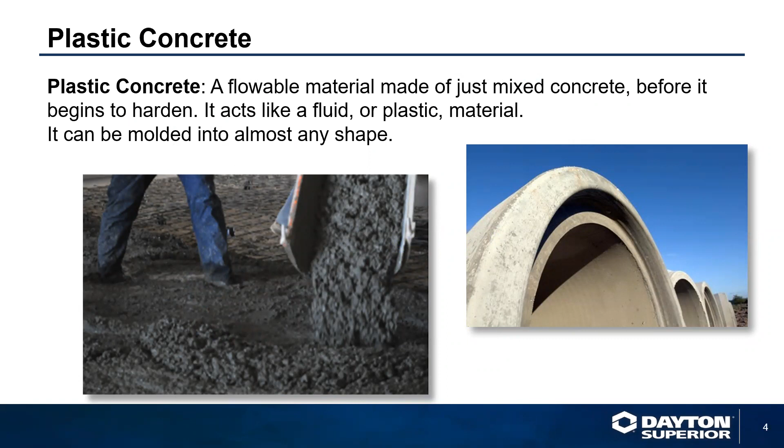Plastic concrete is typically a flowable material made of just mixed concrete before it begins to harden. It acts like a fluid or a plastic material. It can be molded into almost any shape, and typically it is molded with concrete formwork. The formwork is the mold of the system.

As in all products here that we manufacture at Dayton Superior, there is the safety factor involved. Concrete formwork products have a safety factor of 2-to-1, which means if you take the ultimate load or the failure mode of that product and divide it by 2, you come up with the safe working load of that product.

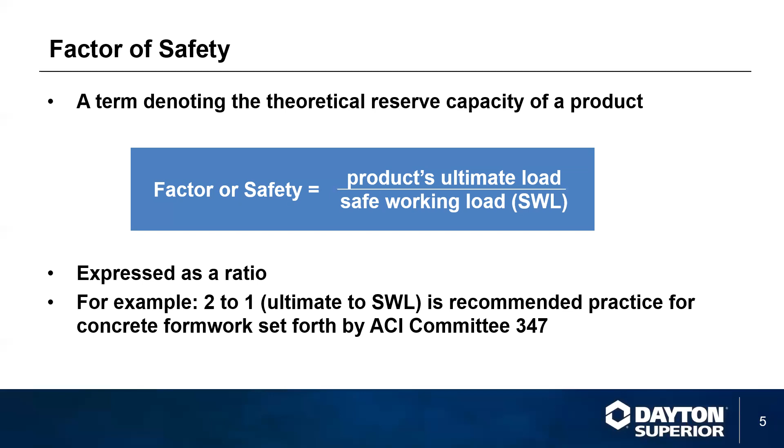We'll talk about formwork, building forms using sticks and boards, the snap tie system, the Jahn system, the Sure-Lock Tie system, and the other systems available in this training. First, let's talk about sticks and boards, or light forming.

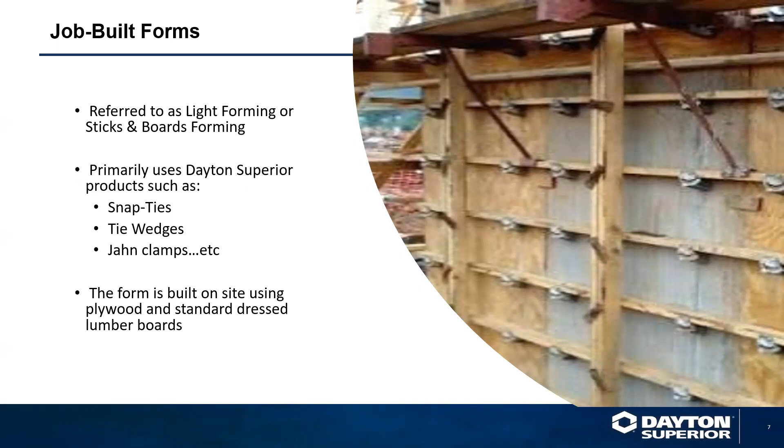Primarily use the Dayton Superior products such as snap ties, tie wedges, Jahn clamps, omni wedges, etc. This form is built on site using typically 3/4-inch plywood and standard dressed lumber, 2x material.

In the cross-section view of this system, you can see we have our plywood sheeting in place with a stud behind it, which is a vertical wood member, followed by a waler, double waler behind it, and then an omni wedge holding the snap tie in place. That omni wedge is also taking up any slack in the system to tighten it up.

Now, the snap tie that's holding the system together comes in 2 varieties. We have a standard cone snap tie, which has a cone on it, typically used on areas that are going to be exposed, so that they can patch the hole and rub it down. We also have a washer snap tie, which is typically used for below grade.

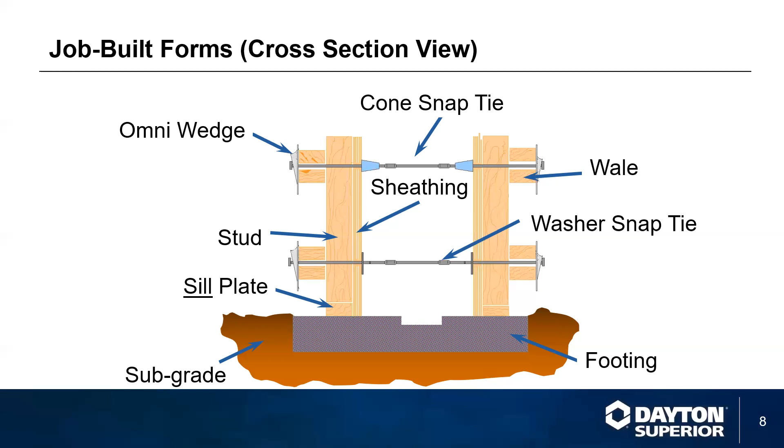I say typically, but a lot of this all has to do with contractor preference.

Walers and Strongbacks. You're going to hear terms of walers, strongbacks, studs, etc. today. Just remember, typically in formwork, when you're using snap ties and wood forming, anything that you have as a vertical board against the plywood sheeting is known as a stud.

A waler is a horizontal reinforcement member behind the plywood. And a strongback is a vertical component that is sitting behind the waler. So if your waler is against the plywood, then the strongback would be sitting behind it.

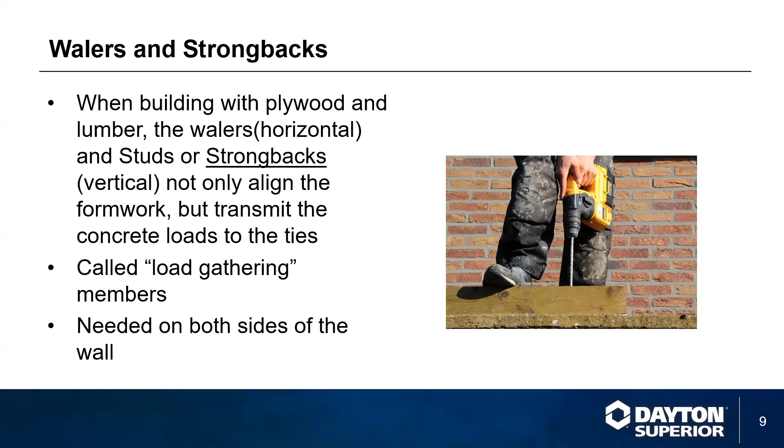Realistically, there is no difference in material based off of strength or the direction of the material. What comes into play here, though, is the plywood, whether it's sitting in the strong or weak direction. So therefore, it is contractor preference how they want to arrange their formwork.

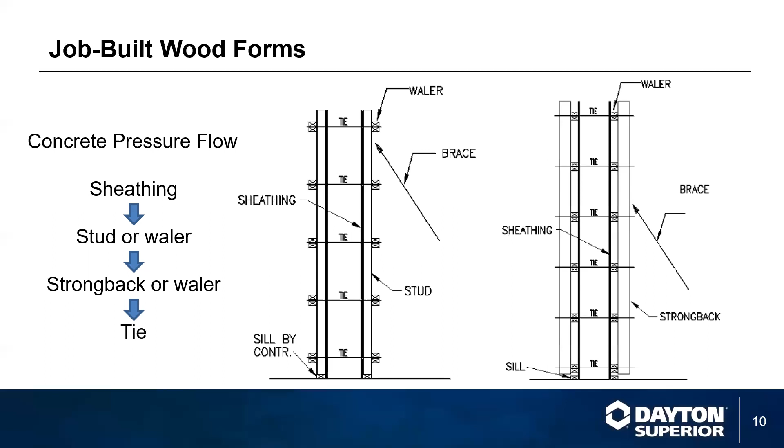The snap tie typically is a hex-headed snap tie. It typically has a hot forged hexagonal head at the end of the tie. The head is actually forged so that you can use a socket to remove it, like a 6-point socket wrench.

The breakback of the tie, which every tie has, is a part of the tie that is actually set, has a little nick in the wire, so that when you put this tie in stress, it will snap off at that breakback point. The breakback point typically is 1 inch inside the wall dimension. So you have a standard wall dimension, your breakback is typically going to be 1 inch.

It can also be 1.25 inches, 1.5 inches, and 2 inches. I recommend anything over 1 inch breakback that you must use the cone on it to get the tie to break back.

Concrete likes to adhere to steel. So if that's the case, then you have more unprotected steel that's going to be in contact with the, especially in the breakback area, in contact with straight concrete. It sometimes gets a little difficult to break back the tie.

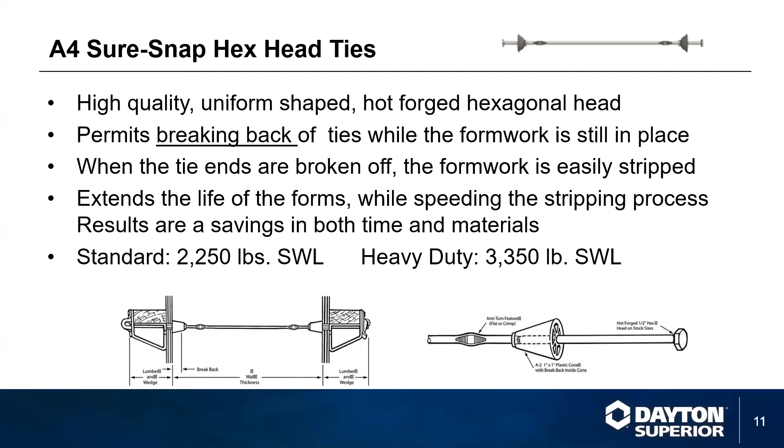The snap tie also comes in 2 different grades, besides being cone and washer. You can also get a standard duty, which has a 2,250 pound load rating, or a heavy duty tie, which has a 3,350 pound load rating.

Calculating what tie lengths you have to have. Typically we have two tie lengths that are standard: a short end and a long end. A short end tie will typically have 3/4 inch plywood and a single 2x piece of lumber behind it, or a single whaler, with a tie wedge up against that. That's a short end, which is a 4 3/4 inch end.

Or, if you're using a strongback and whaler, or a stud and whaler system, you'd need a long end snap tie. That would have 3/4 inch plywood, a 3.5 inch piece of lumber against that sheeting, and then another 3.5 inch member perpendicular to the member in front of it.

You always have roughly a 1/2 inch of take up on the back side of the snap tie, usually taken up with the tie wedge. It's basically shaped like a wedge, so when you apply pressure you can tighten it right up. Once you get it into a snug position, you don't want to over tighten it. There are nail holes provided so you can nail it into place to hold it there.

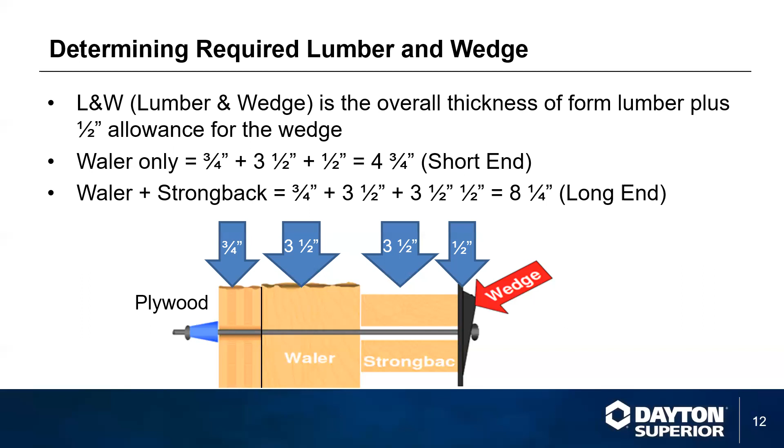With the tie wedge, one of the big things we like to promote here at Dayton Superior, because we're a little different than the other guys in the industry, is that we round all of our edges where the tie actually comes in contact with the snap tie. This helps ensure the tie won't get sheared off or cut by the tie wedge when you're putting it in place. We like to think of it as a safety feature that also helps reduce premature tie breakage.

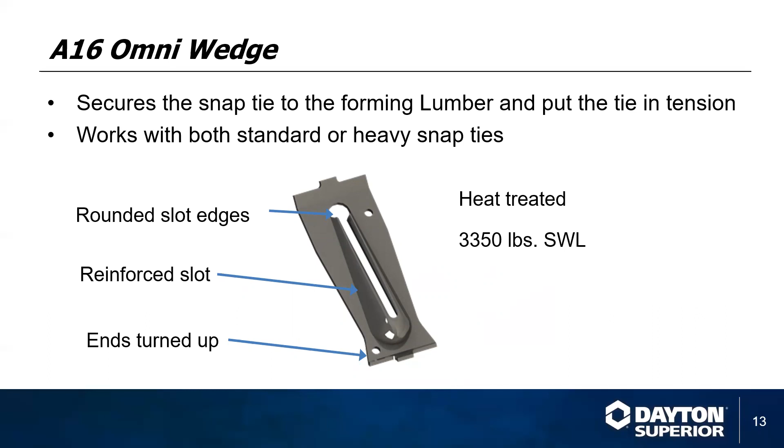The Jahn forming system typically uses a snap tie system, usually a short end snap tie. The majority of the ties will be short end because it's going to be a single 2x4 running in a waler position.

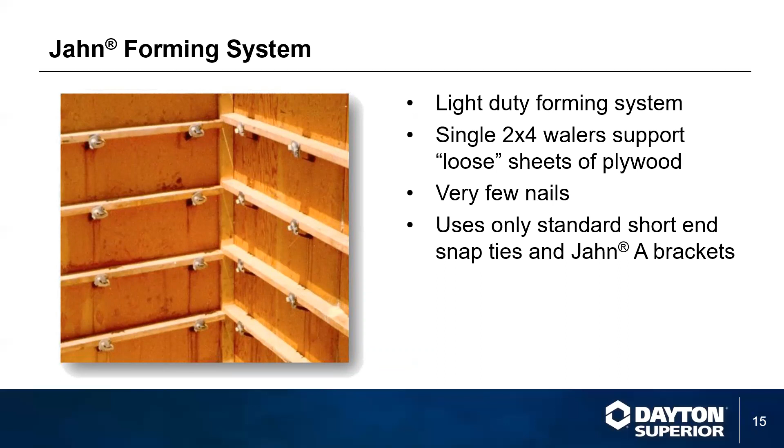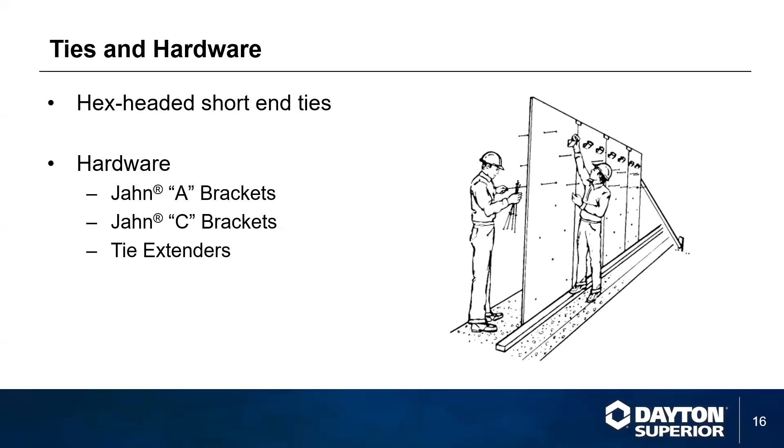Typically how you start out is you have your plywood already drilled with holes in it. You run the tie through with the short end tie, then hook the Jahn A bracket to the end of that tie. The Jahn bracket is typically used with a short end tie. Where you're putting strongbacks with this system, you need a long end tie in place because you'll have a strongback attached to the system also. So about every 8 feet or so, you'll have a row or column of 8 1/4 inch long end snap ties.

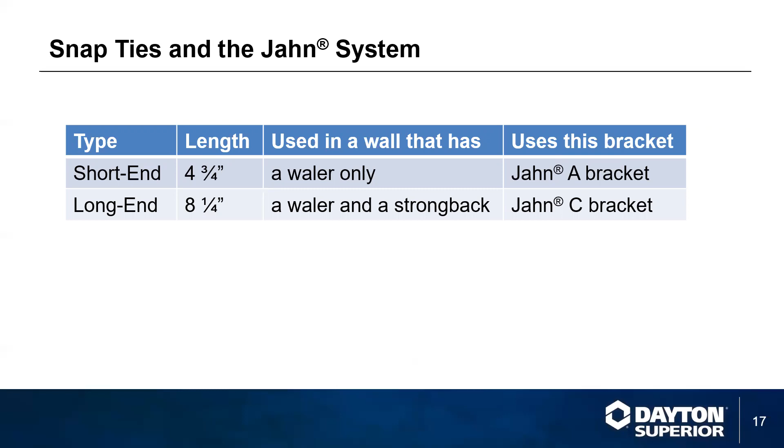Here's a Jahn A bracket. This basically slides in, and as you can see, the tie gets cradled right into the bracket. Once it's in place, that eccentric spins around and gravity takes over, engaging it with the head of the snap tie. So that eccentric piece on the end takes the place of the wedge — you don't have to have the tie wedge to actually tie it up. The eccentric replaces that.

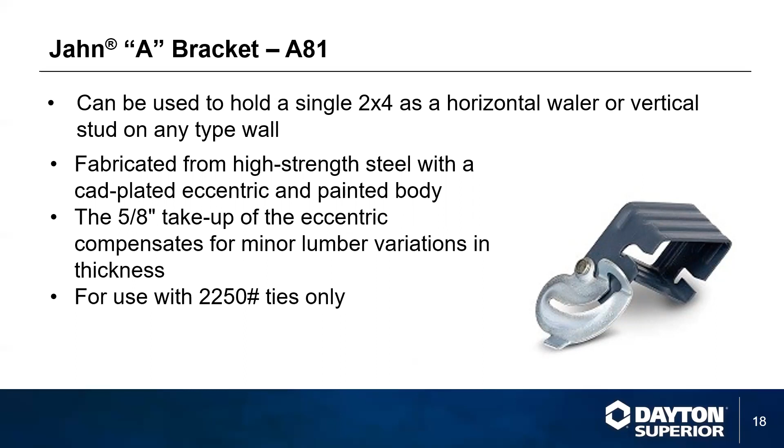If you're using a strongback, the Jahn A bracket won't work, so we go to the Jahn C bracket, which straddles the double 2x material you're putting on there and uses the same eccentric and gravity to anchor it into position. It's a good quality product. Remember, the Jahn system is only used as a light duty system, rated for 2,250 pounds. It's by far one of the fastest systems in the marketplace for forming with snap ties.

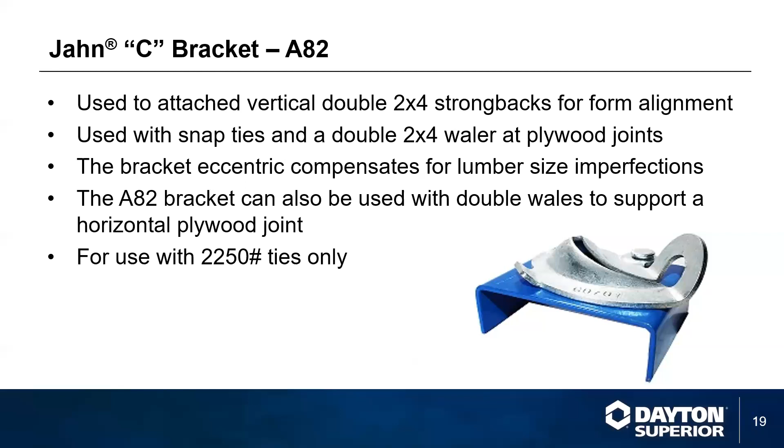In prepping any of the wood for snap tie, you can typically stack drill. Stack drill is just what it sounds like - you're going to have your plywood stacked up in a pile and drill a hole right down through it. Because the hole pattern is typically repetitive, you're going to drill all the plywood with the same hole patterns, and then match those tie holes up with where you're going to have a tie in place.

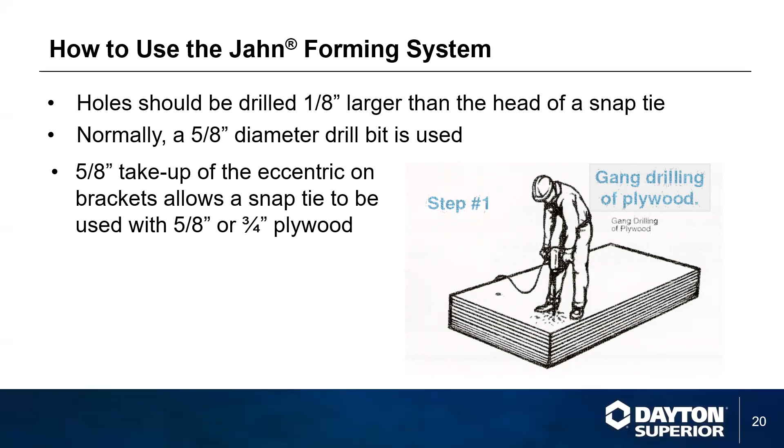Ties go in place here. Once the walers go in place, where the 2x4 walers are going to be butt jointed together, you can use a spreader board across the splice area. I would recommend carrying it to about two clamps on both the left and right side of the splice. Or you can butt the joints together right over the top of a bracket.

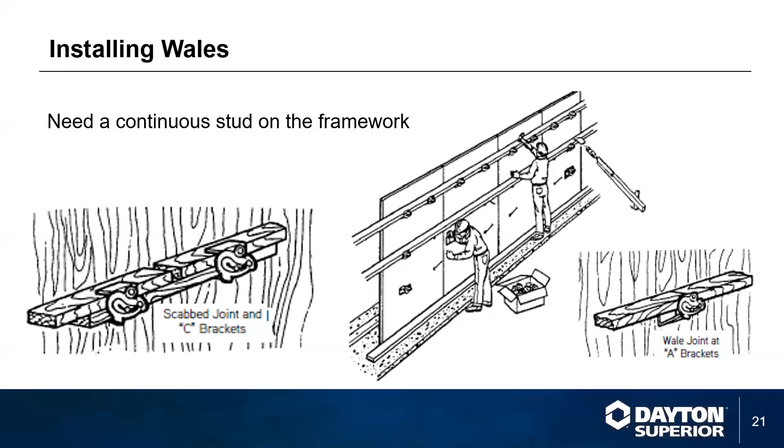Corners are typically formed up using a Jahn corner bracket. This basically connects to the lumber as shown here, with one piece protruding out past the side. The bracket actually connects to that by nailing it in place with a 6-penny nail, and then tighten down the wedge to hold everything in tight.

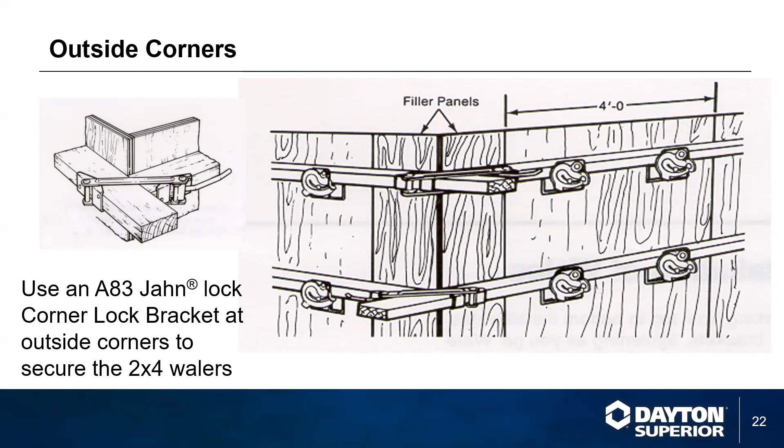Strongbacks typically get put in, as I said before, about every 8 foot on center. You would use the long end snap tie to take over for that, and then you would actually brace or align the systems. Bracing is typically another facet of the business, which is typically a responsibility of the contractor.

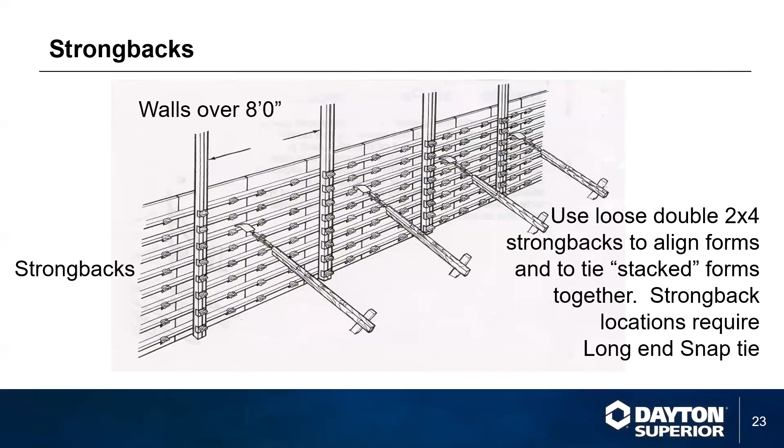But we actually provide alignment brackets here, which are our turnbuckles. Typically, we'll give you 3 inches of adjustment in or out.

Typically, where you're going to have walers in place, you can use the bent plate because that will attach to the waler board. If you have studs or strongbacks, you can use the flat plate because that will attach to the vertical member, either the stud or the strongback.

On the back side here, you have a 1.5 by 1.5 angle iron with nail holes in it, so you can extend a 2x4 into it for whatever length you need for the site, and actually nail that into a nail stake driven into the ground for an anchoring point.

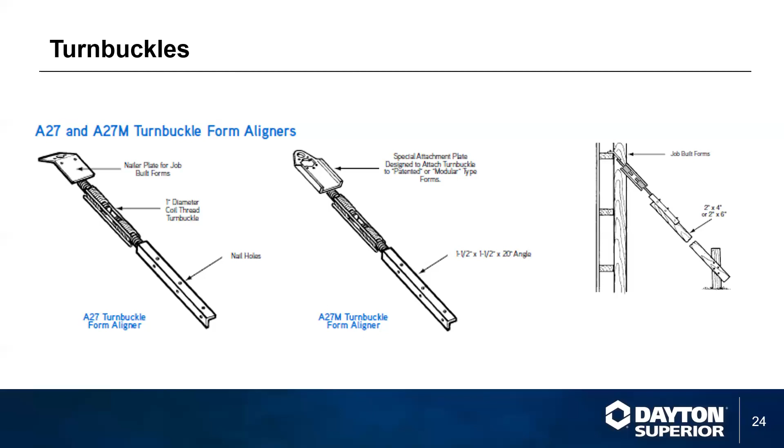Other systems that are available, we have the A55 Sure-Lock Tie. The Sure-Lock Tie is a self-centering 1x1 cone.

Typically, you're going to drill a hole of 11/16, and what will happen is the tie will come up to the hole. The loop will go through the hole. The cone then will basically self-center on that, as you can see, because of these ridges on the cone. So it is now self-centering. There is a standard 1-inch breakback, and this is only available with a 1-inch breakback.

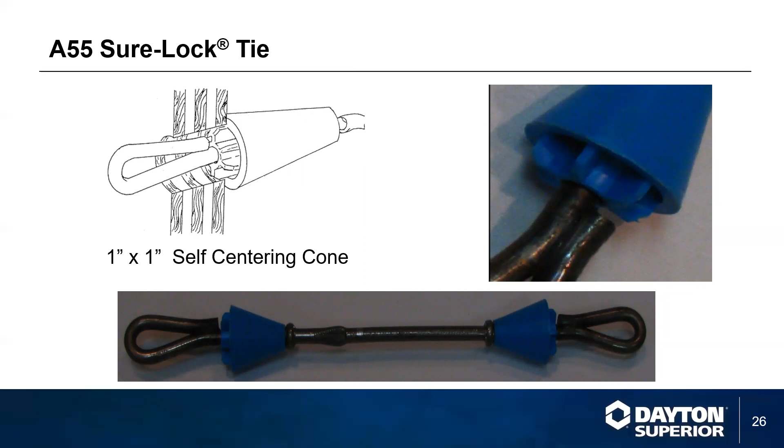But you'll see this tie here sticks through. It has the loops that stick through the plywood, and you will make the connection with the Sure-Lock bracket. Now the Sure-Lock bracket has a hook.

Right in here, that hook will actually hook into the loop of the tie, and as you pull that, turn it towards the plywood, you will engage the hook. And the hook itself is actually beveled so that it will take up any slack.

You would put your 2x4 in this position up here. So your 2x4 will go into this area here. And you will draw that up tight against your woodwork.

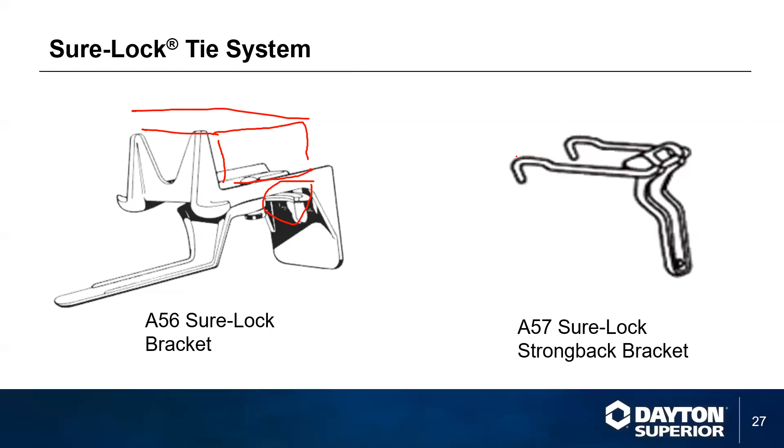Should you have to add a strongback to this system, you take this little hook right here and hook it right over the edge right here, and this one from the other side. And then your 2x4 will slide right up in the center of that. You have a wedge here on a handle that you will be able to pull down to actually draw it up tight so that you take any slack out of the system, so everything is in tension.

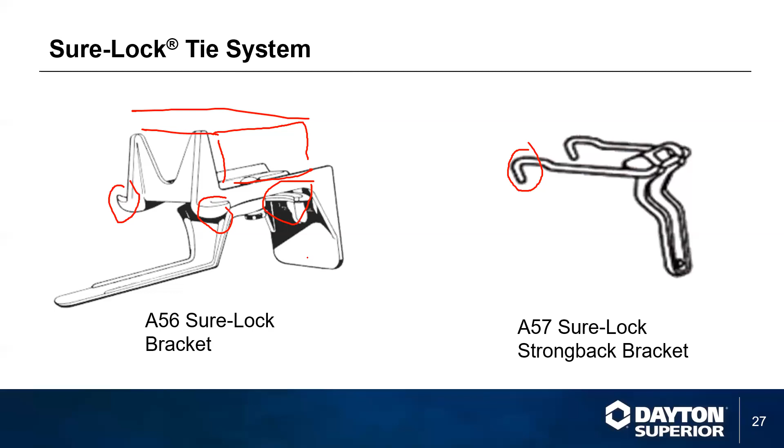The other option we have, we can go with spreader cleats. You see this system on a lot of projects where they use a post-tensioned or pre-stressed floor slab.

Typically, where they're using a floor slab as their foundation, what will happen is they will pour a small, what we'll call a knee wall, a short wall, on the edge of their slab, which will have their sill plate sitting on top of it. Typically, these little knee walls are anywhere from 12 to 18 to 24 inches high, depending on the application or what part of the country you're from.

The wall thickness is preset, and you have a couple of different lumber options. You can either go 3/4 inch lumber or 3/4 inch plywood, or you can use an inch and an eighth plywood, or typically an inch and a quarter plywood.

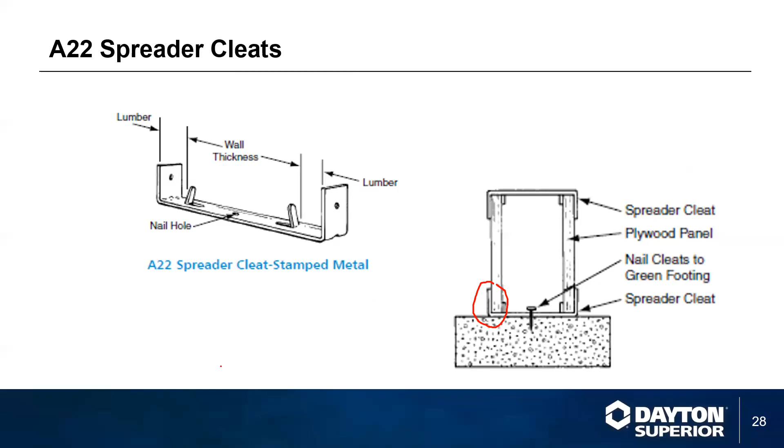Typically going to be a D12 or D12S, or it could be a D12F, which is spring loaded. But the D12 and D12S are typically held in place by that bolt that tightens it. So once you tighten down on the pencil rod with that bolt, that locks the tie into place.

Once you have that tightened right up, you bend the wire up at a 90-degree angle and go to the other side of the wall system.

Now, the one drawback with this system is you will have to install a spreader cleat to put a definitive wall dimension in. So when you draw the wire up tight with the rod clamp and the rod tightening wrench, you're going to push against that spreader cleat, and the wall will be set at a select thickness or width.